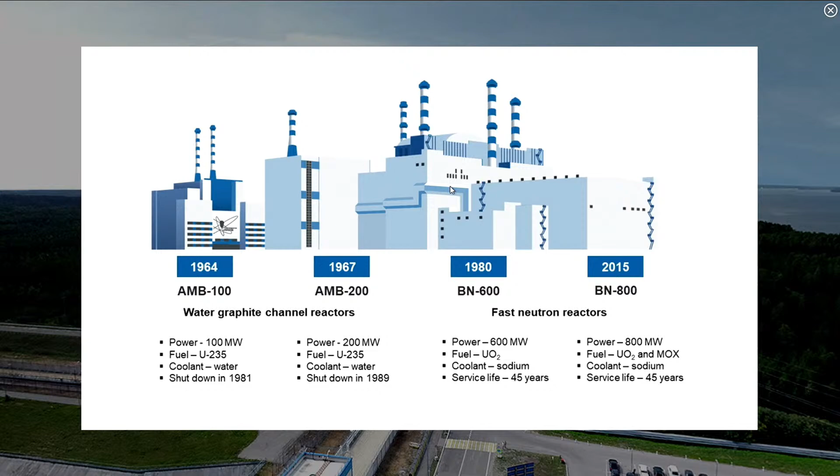In 1980, a third reactor was built at the site. This time it was a new type of reactors, a fast sodium-cooled reactor with a capacity of 600 megawatts. It was called BN-600. BN-600 became a prototype for the most powerful fast reactor, of course, in the world, BN-800.

The power unit startup took place on the 10th of December 2015. Its design service life is 40 years. These days, the unit is operating normally, generating 880 megawatts of electricity. So let's learn more about this unique reactor.

And we are going to the administrative building. Here it is. This is the starting point for all excursions, virtual and real ones. The reactor mock-up is located here, as is the unit heat flow diagram. And by the way, my office is also in this building.

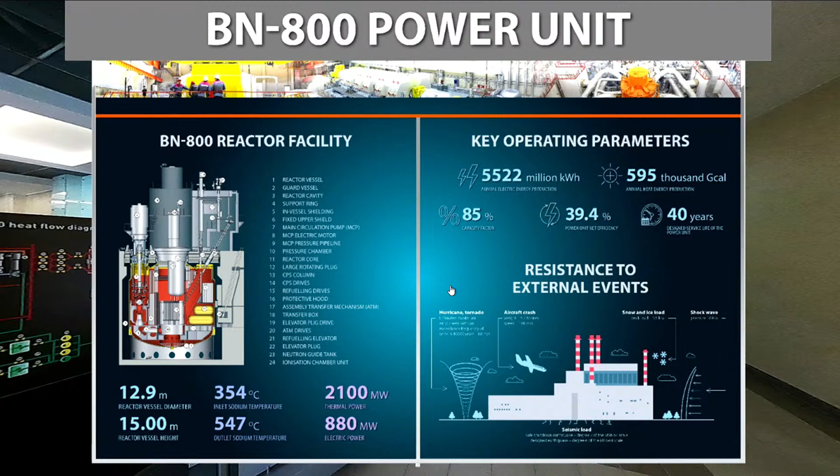So, BN-800 replicates the design and technological achievements of BN-600, its predecessor. And in line with the current trends, it incorporates a number of additional passive safety systems. These systems do not depend on humans or automatics. Emergency air cooling system is among them.

Do you remember I showed you the first 3 units with 1 ventilation stack for each? And on top of the BN-800 reactor building, you can see not 1 but 4 ventilation stacks. 1 is traditionally used for normal operation, the other 3 form this emergency cooling system. It works by natural air circulation through heat exchangers. Even without electricity, heat will be removed from the reactor.

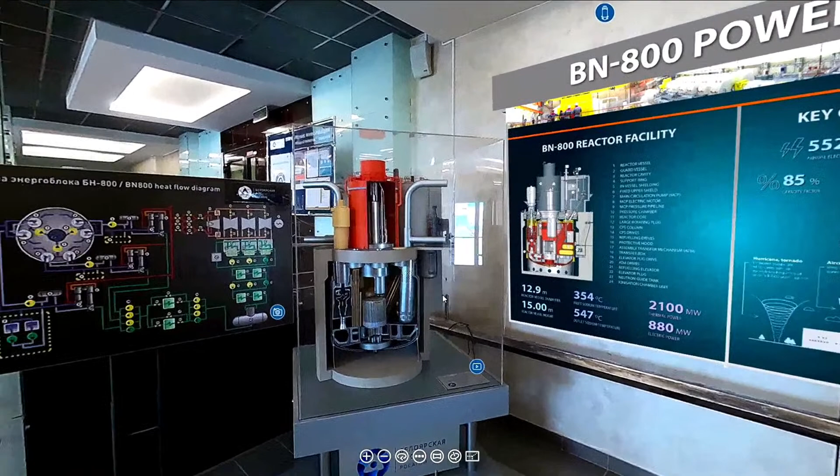Another innovation is the emergency shutdown system.

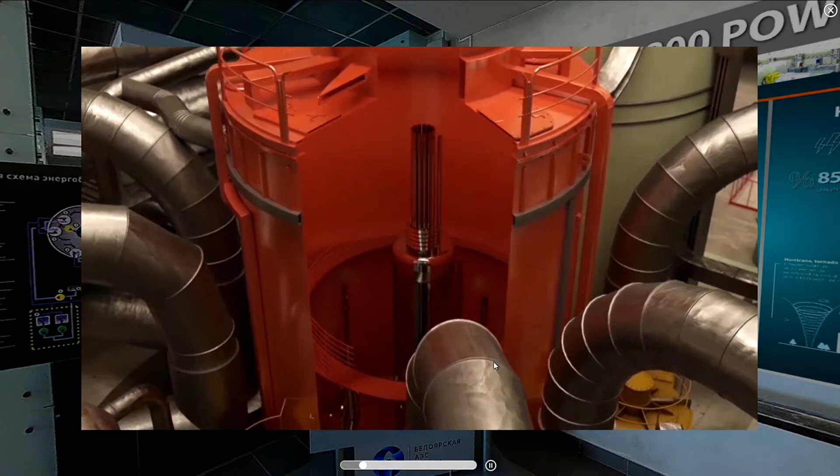Yes, thank you. Okay. So, emergency shutdown system. It consists of rods floating in sodium. When circulation pumps are in operation, sodium flows upwards the reactor core and keeps these rods on top like buoys. You can see these golden rods here.

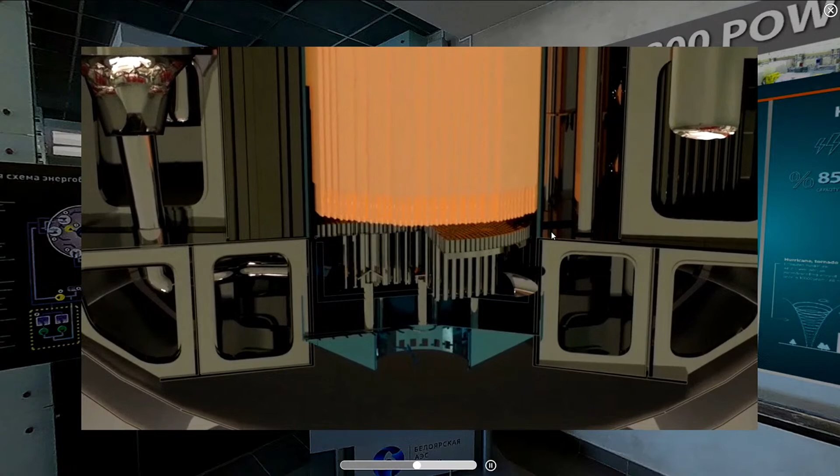Should the sodium circulation cease, the rods will drop into the core and stop the nuclear reaction. And this device at the bottom of the reactor vessel is a core catcher. In case of the most improbable and fantastic accident involving fuel melt, it will retain fuel and prevent further reaction.

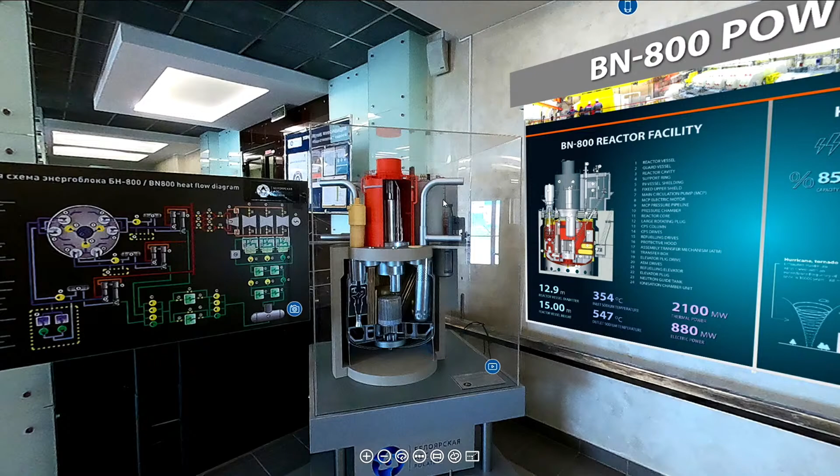All these systems increase the reactor safety. But why are fast reactors not just a safe and effective way to generate power, but a real scientific breakthrough? People cherish a dream of an unlimited energy source. The nuclear industry is getting closer to this dream with its new technological platform based on a closed nuclear fuel cycle. And here fast reactors appear.

As other power reactors, BN 800 generates heat and power. But only fast neutrons can make use of uranium-238. This isotope represents more than 99% of natural uranium. These are huge energy reserves, but they are not used today because reactors cannot digest them. What's more, fast reactors can operate on unburned fuel from other reactors, thus reducing waste and producing new fuel.

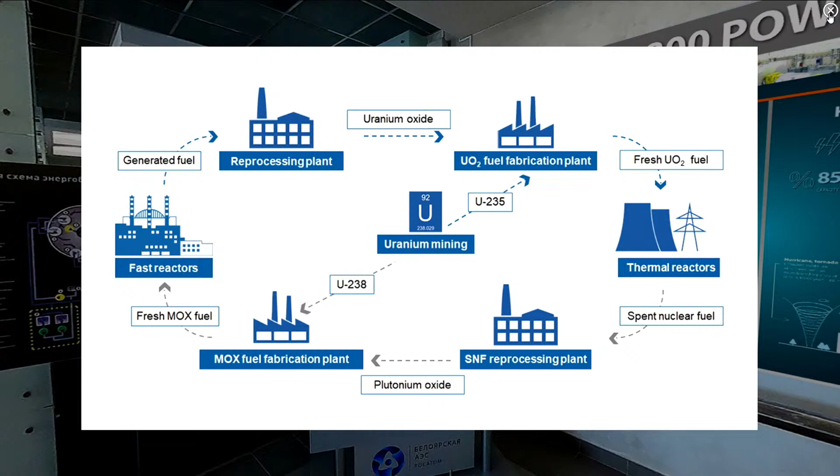And I can't help but add some advantages of fast reactors. They are also one of the most environmentally friendly reactors. They contribute to the environment by zero carbon dioxide emission. So I think it's the right time for us to go and see the pride of Beloyarsk nuclear power plant itself. We are on a special deck for tour groups with a great panoramic view of the reactor, so I offer us to take this advantage and have a look around just for a moment.

Here it is, the reactor. Our employees often call it an octopus. You can see its orange body and silver tentacles. Actually, these are sodium pipelines, and this is a reactor protective hood. The reactor itself is 16 meters below. As you know, during the nuclear reaction, a lot of energy is released. That is why in the reactor the temperature is very high. To control this temperature, reactors use coolants.

Most reactors in the world use water for this purpose, but BN 800 uses liquid metal, sodium. This choice may seem surprising. Meanwhile, sodium is much safer and more efficient in many ways than water. It will never boil, not in our reactor. It doesn't corrode metal parts, it imposes operation at low pressure, and it conducts heat well.

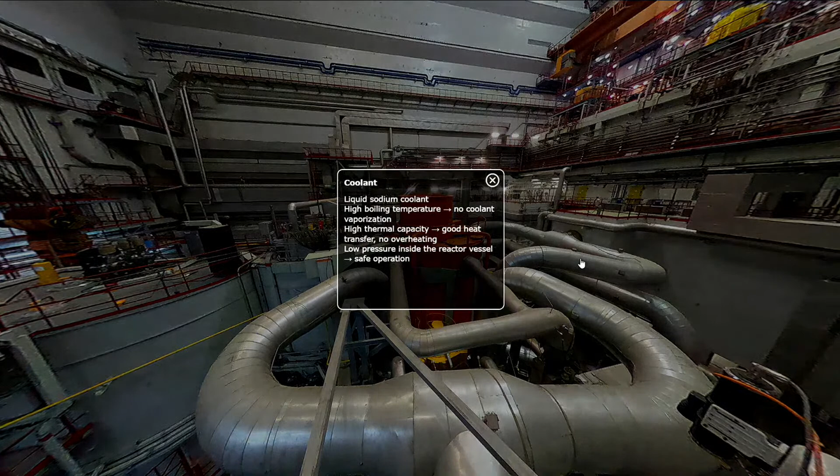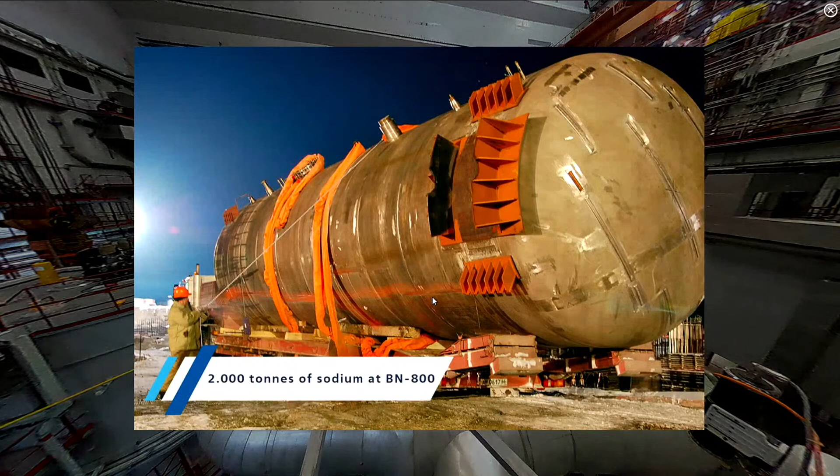But the main fact is that sodium doesn't moderate neutrons, so they lose less energy than in water and remain fast. That's how they can involve uranium-238 into the fission process, and as we have already discussed, that can significantly expand the fuel base for the nuclear industry. And in this picture you can see the moment when in 2013 2,000 tons of sodium arrived at BN 800.

Let's go upstairs and see the reactor from the point where no real tour group has ever been to. I must also add that neither have most employees. Under the orange protective hood, there are sodium pumps, intermediate heat exchangers, reactor control and protection system, and refueling system. Yes.

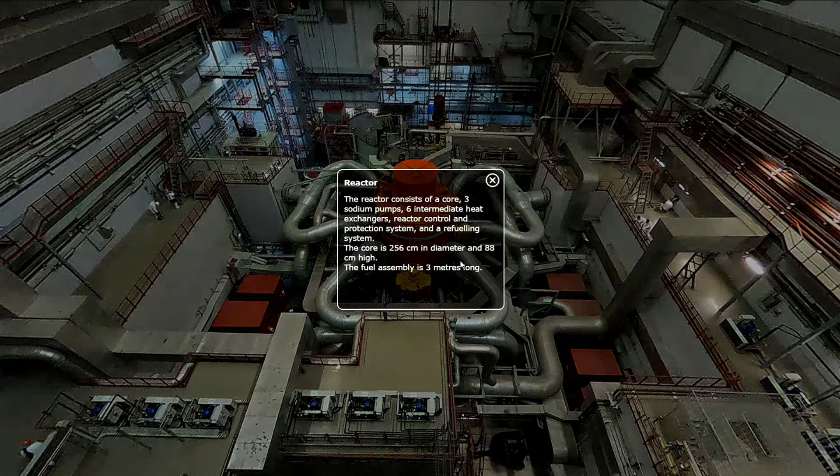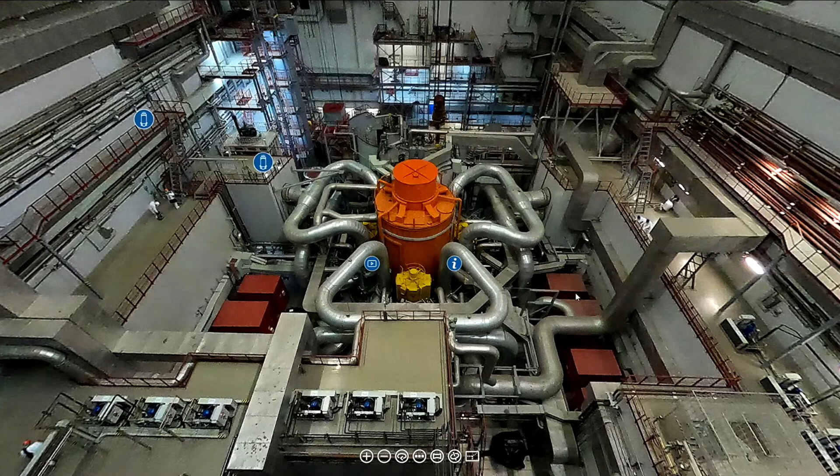The compact core is inside the reactor. It is formed by fuel assemblies, long hexagonal rods. Each fuel assembly contains a bundle of fuel pins or rods with nuclear fuel pellets inside. Unfortunately, the only way to see what's going on inside our reactor is with computer graphics, so let's do it right now. The reaction starts inside fuel assemblies. You can see them here.

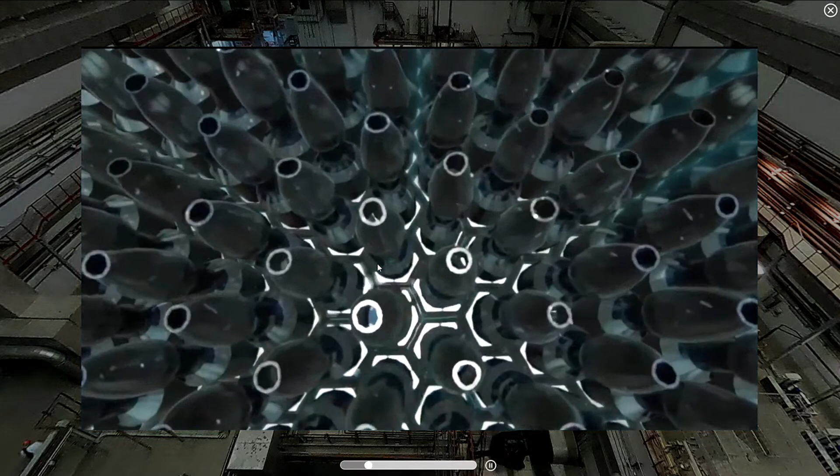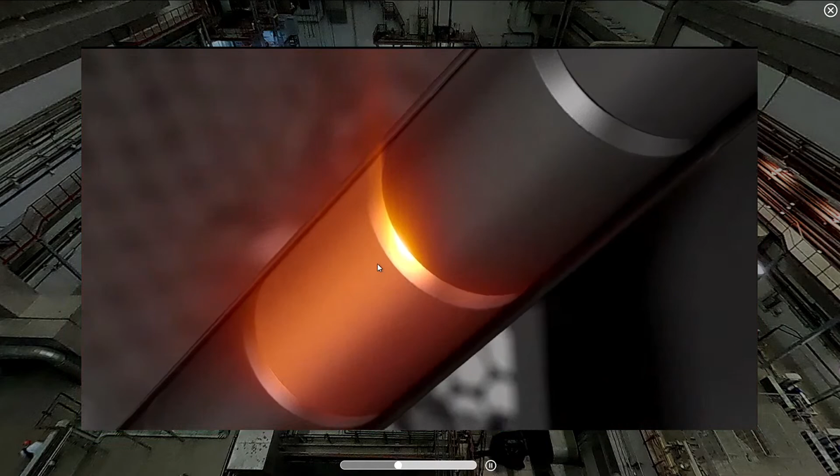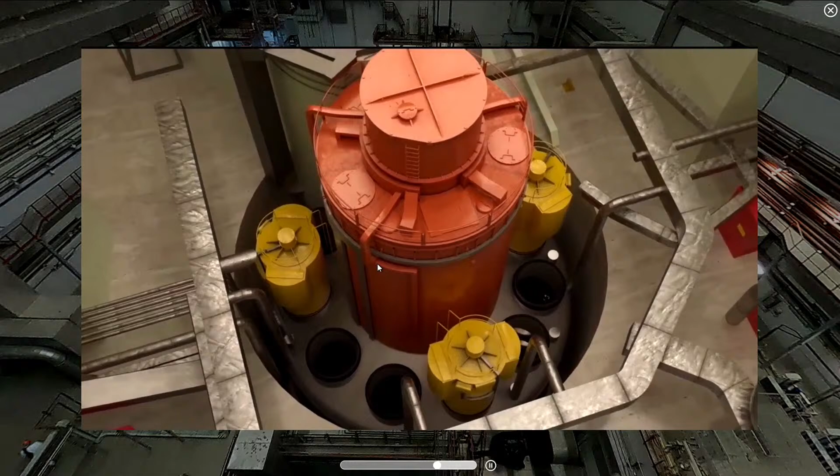When a neutron hits a uranium nucleus, it splits into fragments and forms more neutrons. Because during this process a lot of energy is released, the fuel pellet heats up. High thermal capacity of sodium prevents the reactor from overheating. To make the reactor even safer, radioactive sodium flows only inside the reactor, and the heat goes to the steam generator through intermediate heat exchangers. You can see them on the video. Sodium circulates in 3 loops, and each loop can work independently of the others.

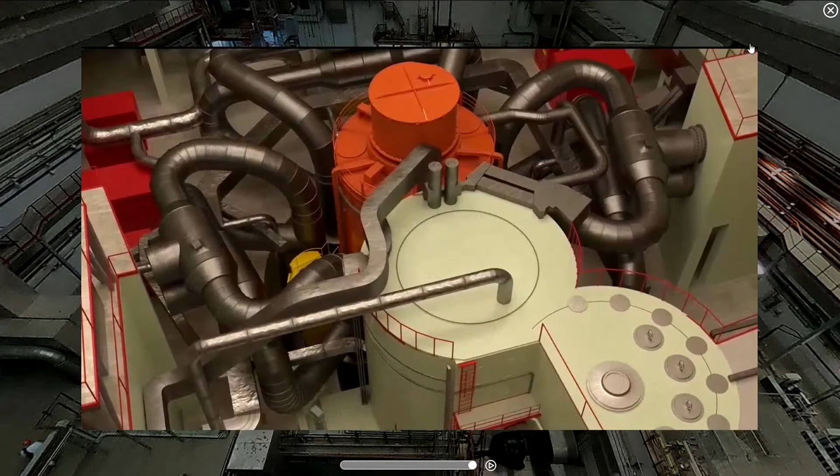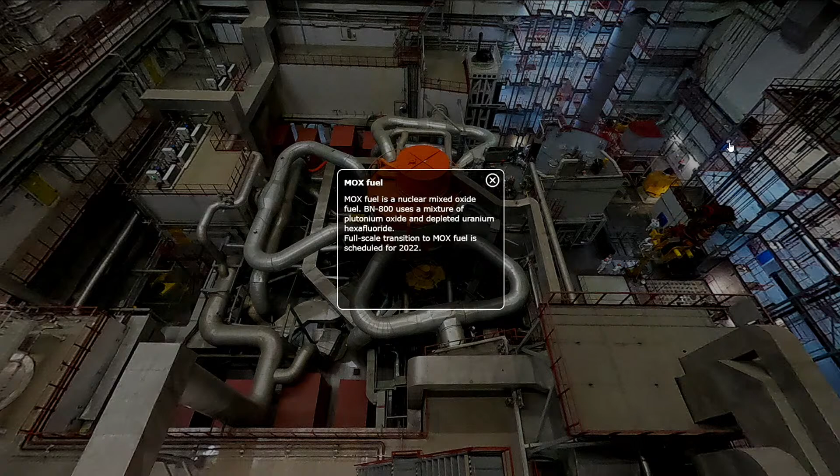Nuclear power of the future will be represented by a dual component system. This system will include thermal and fast reactors joined with a closed MOX fuel cycle. So it will be more like 2 cars refueling each other. MOX fuel is a mixed oxide fuel, and MOX pellets for BN 800 contain plutonium oxide produced by power reactors and uranium oxide, so-called enrichment tailings or enrichment wastes.

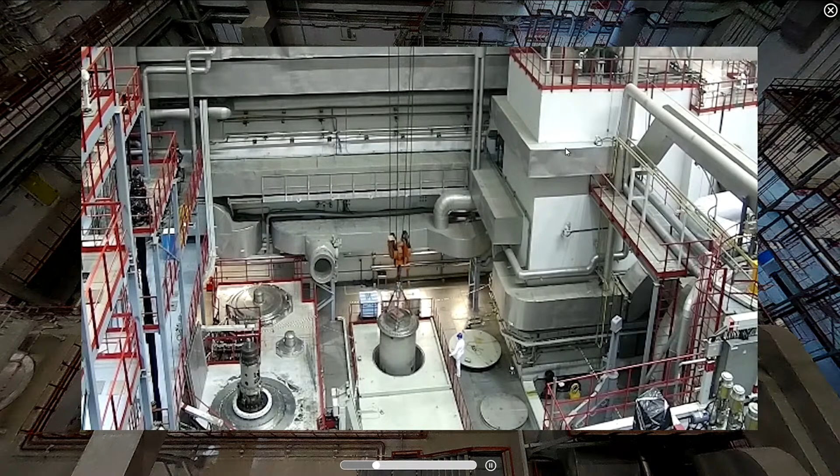The BN 800 core was hybrid at the beginning. During the startup, it was partly loaded with traditional uranium fuel and partly with experimental MOX fuel. Step by step, we convert the reactor to MOX fuel, and in this video, you can see the MOX fuel being loaded into the reactor in January 2021, a year ago.

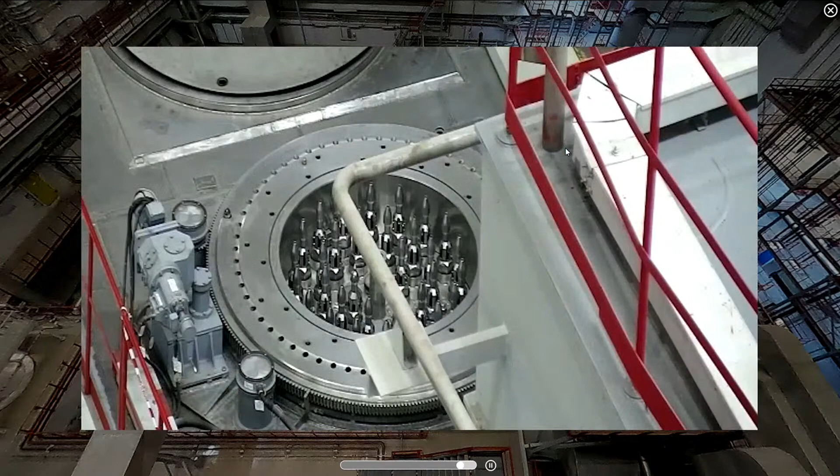And the latest refueling campaign, not the last yet, was completed about a month ago in December, and since then 2/3 of the core are operating on MOX fuel. Why am I so excited about 2/3? Because when the full-scale transition happens, this will be a step towards a closed nuclear fuel cycle.

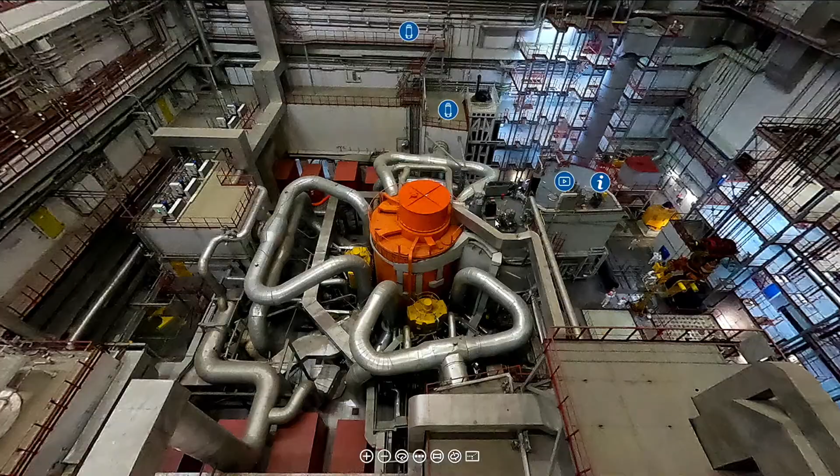BN-800 was designed to master new technologies. It is attractive but challenging at the same time. Safety is our top priority, and we strive to comply with international and Russian safety standards. And we confirm this compliance through numerous inspections and reviews. But it's time for us to go to the next point, to the turbine hall, and follow the heated sodium.

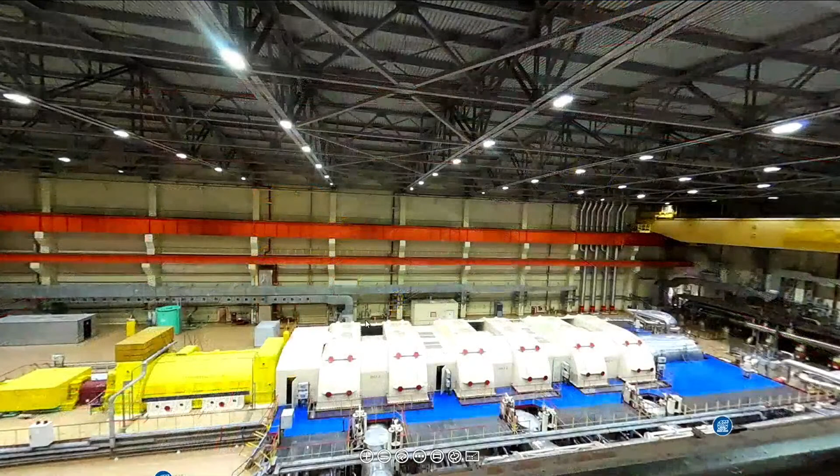Now we are in the turbine hall where electricity is generated. Usually there is a lot of noise here due to the working equipment. We're lucky not to have it on the virtual tour. As you can see, there is nobody here at this moment. We didn't evacuate people to take this picture. The thing is that most processes are automated or remote, so the field operators go to check the equipment only every 2 hours. So we can say that empty halls mean smooth and flawless operation of the plant.

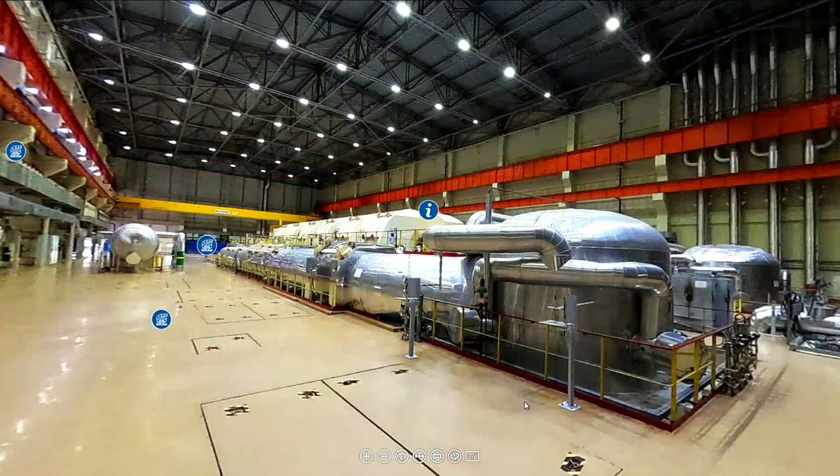When heated sodium leaves the reactor core, it comes to the turbine hall and gives heat to water in the steam generator. That's why the water turns into steam and goes to the turbine. The turbine occupies almost the whole hall. You can see it here. Just to get the idea, imagine an airplane, to be precise, a Boeing 737 with its engines running, the same size, the same noise. And in the next video, we are going to see what happens inside the turbine.

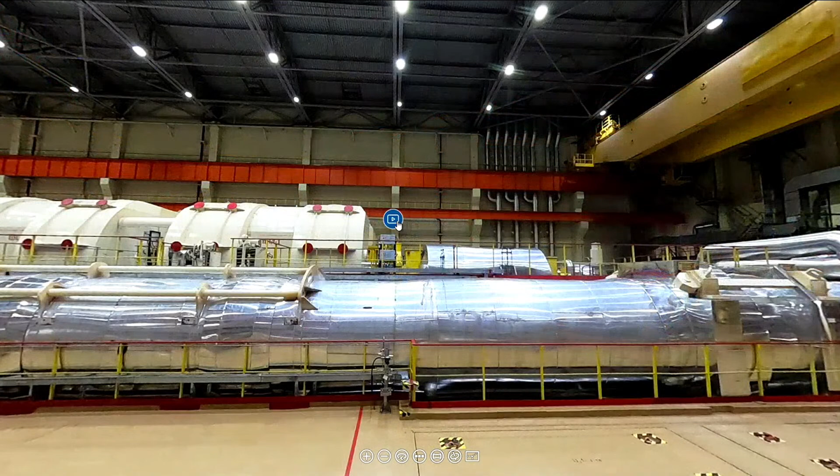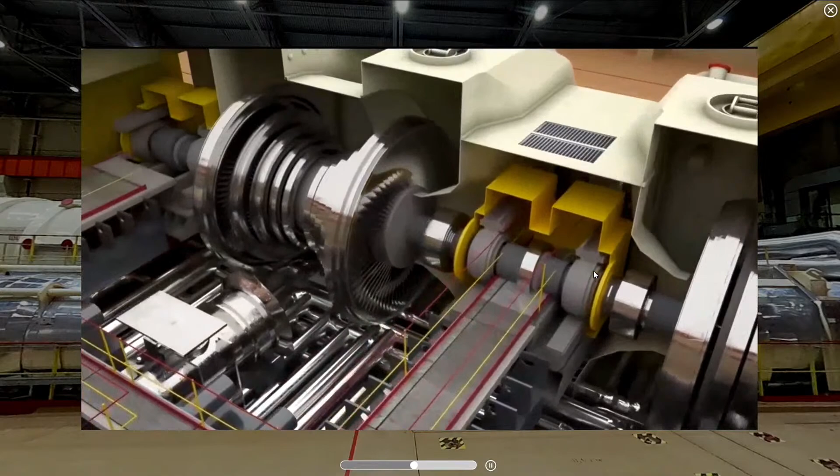When steam passes through pressure cylinders, it pushes the turbine vanes. The turbine rotates itself and rotates the alternator. And there, the mechanical energy is transformed into electric power. So finally, we have electricity.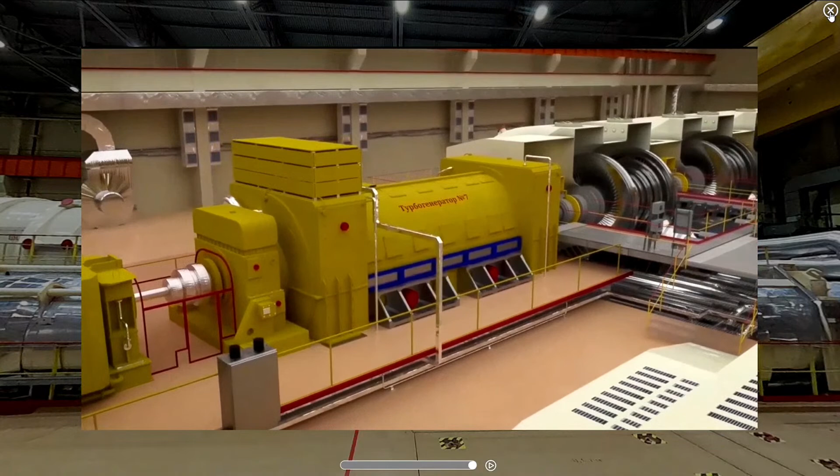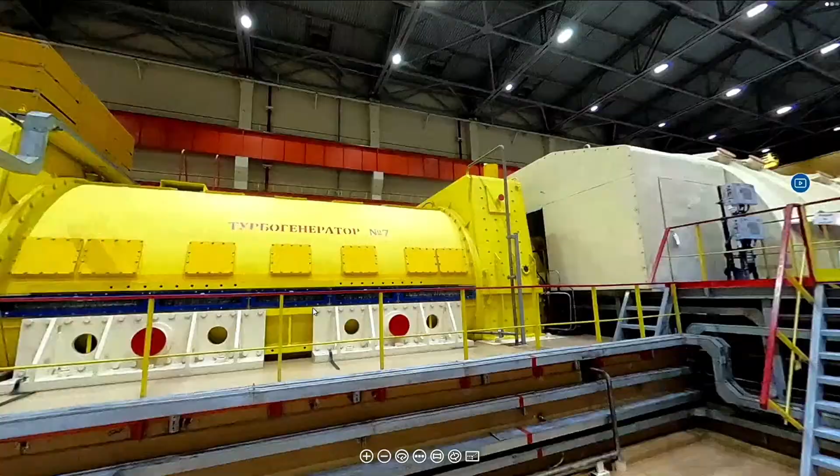Going back to the airplane. Think back to a time when boarding the airplane. Its engines are running, you feel the vibration, and because of the noise, you can hardly hear other people. Yes? So I remind you, we have a Boeing 737 in our turbine hall. Its engines are running. And I want to show you one more video where a senior turbine operator puts a 25mm coin, I will show it to you closer after the tour, on its edge on the working turbine. So let's see and watch the coin.

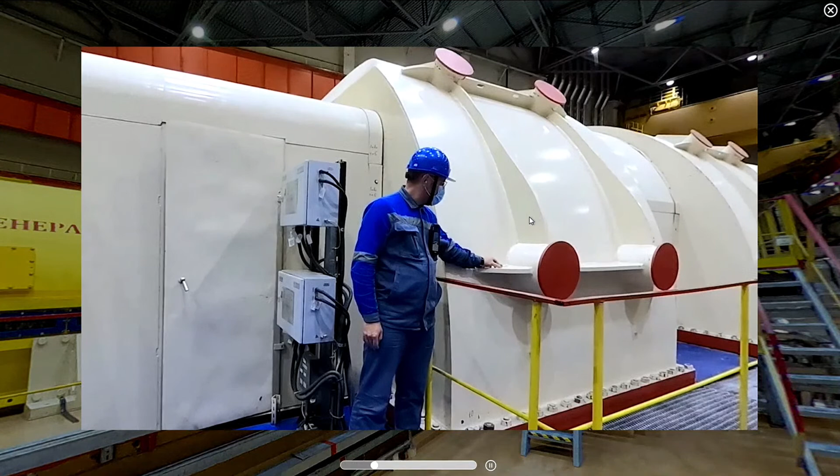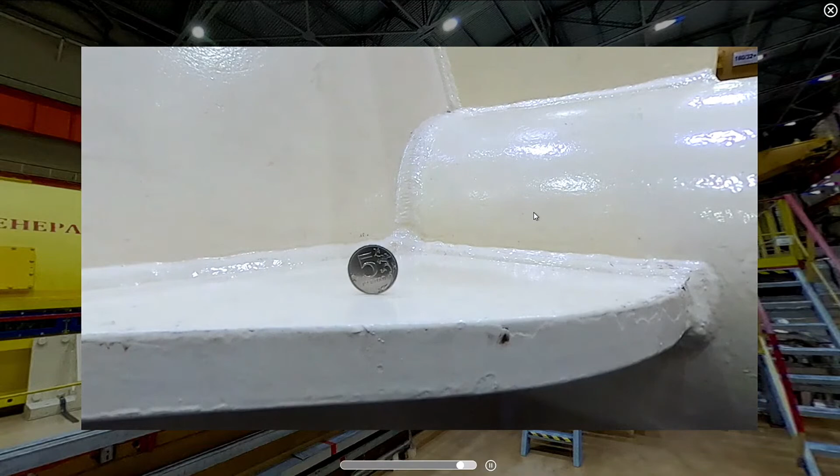The coin doesn't fall over. You cannot hear the noise, but you have to imagine it like an airplane. I can hardly put this coin on its edge on a flat steel surface which is not moving or rotating some mechanism inside. So you can try to do it after the tour. Maybe you will be lucky to do it. And now imagine the coin on the wing of the working airplane, not flying yet, still on the ground. So you see that despite its incredible size, the turbine rotates smoothly without excessive vibration. But let's get back to electricity.

Now we are at the main control room, or MCR, the brain of the power unit. All technological processes are controlled here, from nuclear reaction, heat transfer, water heat, to alternator rotation. But I invite you to go back again for a historic moment which took place in this room.

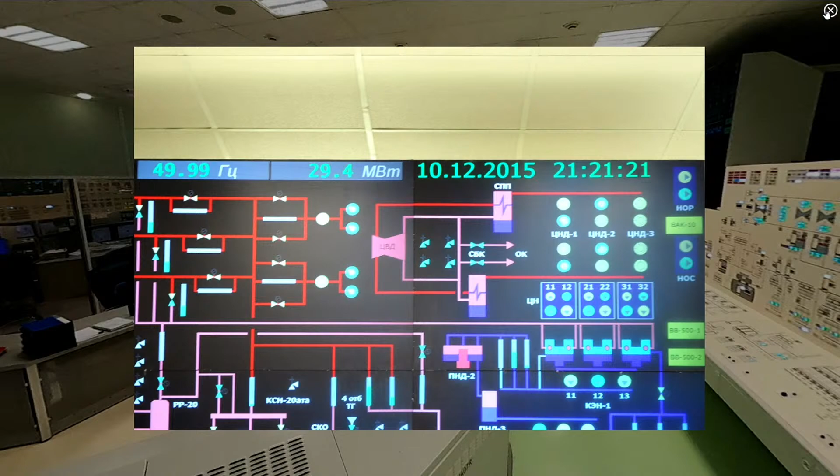Look at this picture. It shows us a great moment for Beloyarsk nuclear power plant, and in my humble opinion, even for the whole nuclear industry: connection of power unit 4 to the grid. Remarkably, the first megawatts of electricity were transferred to the grid at 21 hours, 21 minutes, 21 seconds. It was mere coincidence, but we were lucky to capture this moment. Let's get back to the present.

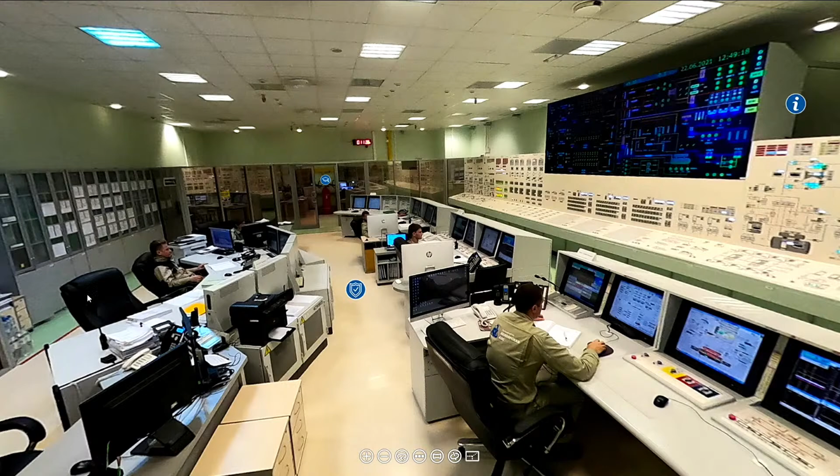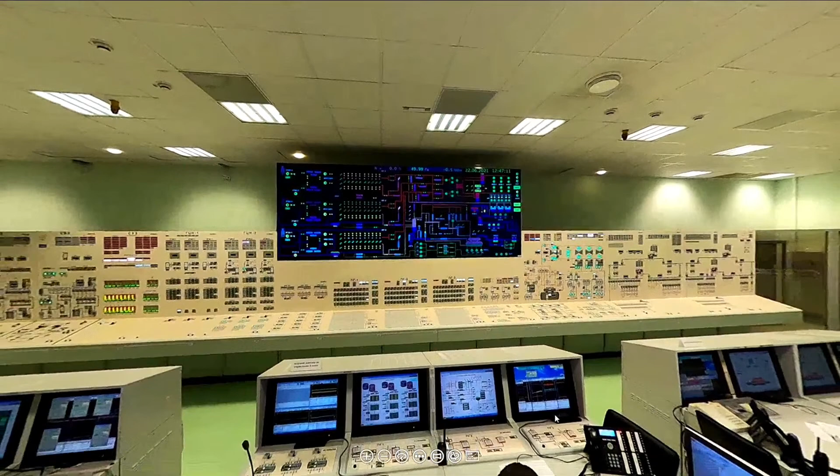The main control room includes workstations for senior operators, department shift supervisors, and the main person here is the power unit shift supervisor. In front of you, you can see a large screen display. It shows the diagram of all equipment and systems at the plant and their status. But in my opinion, the best place at the MCR is here. Just a moment, not here yet.

Yes. Now we are behind the shift supervisor's back, and we have a chance to see the MCR the way he does. You can see that he has an overview of all operators and all monitors. From his workstation, the shift supervisor can assess the state of the entire power unit.

To become a shift supervisor, one must get a field-specific degree, study a lot, and pass many exams to get permission by the Russian regulator. This is a critical job, so it requires a lot of knowledge and experience. And these are only 10 minutes of MCR non-stop operation. Imagine the responsibility these people take on. In order to respond to any issue, they must be professionals, have good health, and be well trained.

The operating personnel receive ongoing training at the training center. So I invite you to go and watch, see how it happens. No matter how high-tech the plant is, its main value is in people. More than 2,500 people work at the Beloyarsk nuclear power plant. In these classrooms, they study occupational safety, radiation protection, fire safety, and other work-related subjects.

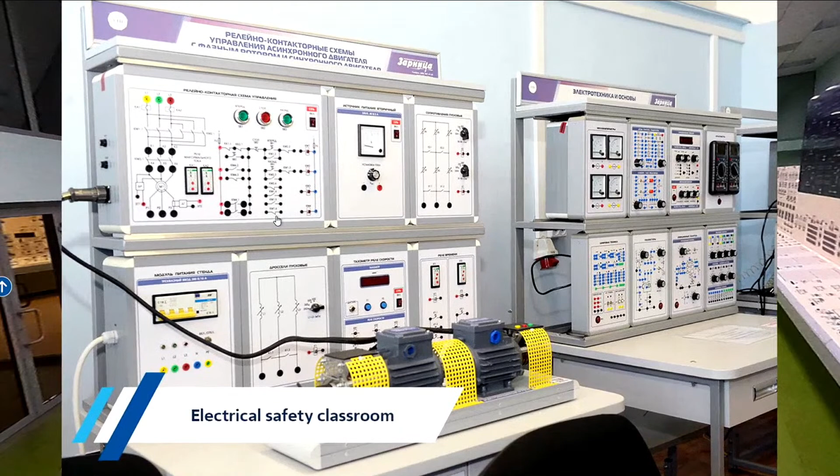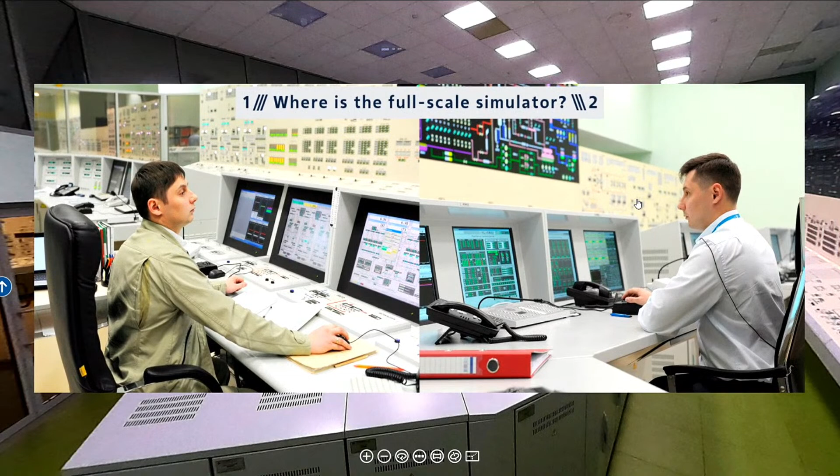For the maintenance personnel, the training center provides classrooms with equipment mock-ups, and for operating personnel, analytical simulators are used. But the gem of the training center is the full-scale simulator of BN 800. But before we look at it in detail, I would like to show you two pictures. One of them shows the real main control room that we have visited already. The other is the full-scale simulator. So I invite you to look at these pictures and guess where the simulator is.

Okay, maybe we should vote. Please raise your hand if you think that the simulator is in picture one. One, yes, one. To the right, to the left. Okay, and those who think that the simulator is in picture two? Oh, good job. Yes, that's the simulator. Actually, I've been to both places, but I can distinguish between them judging by the uniform the operators wear. Well, yes, as well. Thank you for this remark.